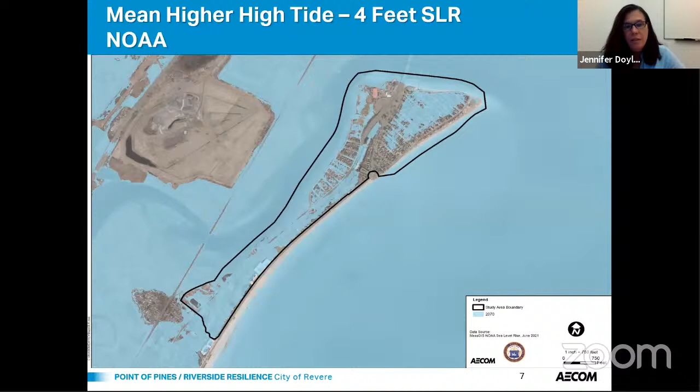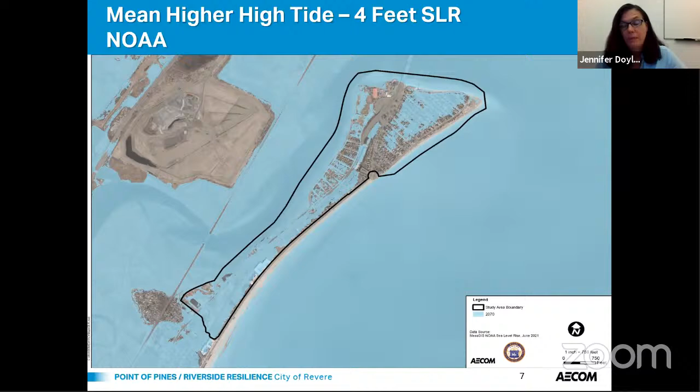So looking at these slides gives us an idea that perhaps somewhere in the next 30 to 50 years, there may be a tipping point coming where, on a daily basis, this slide shows the high tide on an average day, without any storms, a large portion of the study area would be inundated daily. This highlights both the need to consider options to protect these areas, and sets the stage for what 2070 may be like, even if you were to implement some of the tools we're going to talk about. There's just going to be more water closer in everywhere, less beach - that's what is predicted to happen in the future.

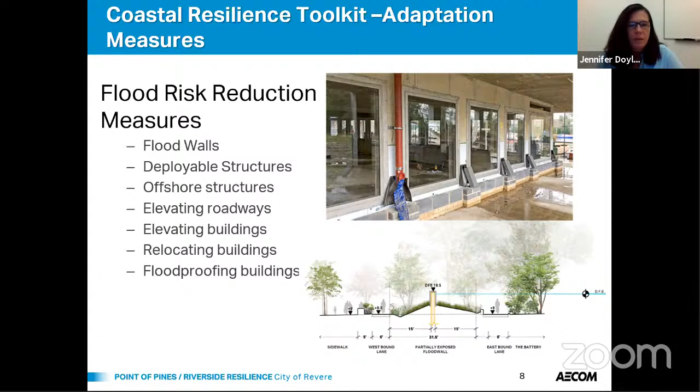The second set of tools we looked at fall into a category we identified as stormwater management tools. These tools would be less effective at holding back high floodwater levels in the future, but they have a lot of benefits for helping to treat rainwater, increase precipitation management, improve water quality, and also improve habitat quality in some applications.

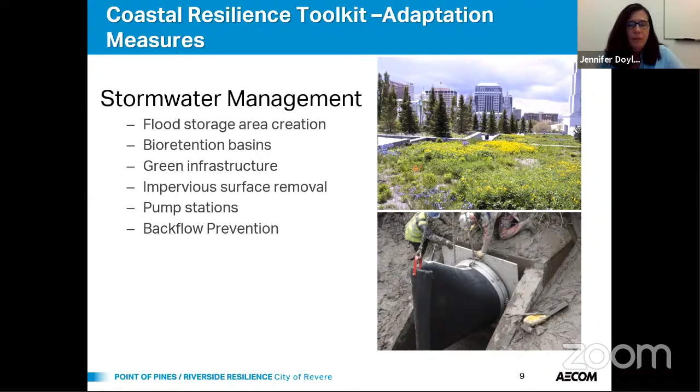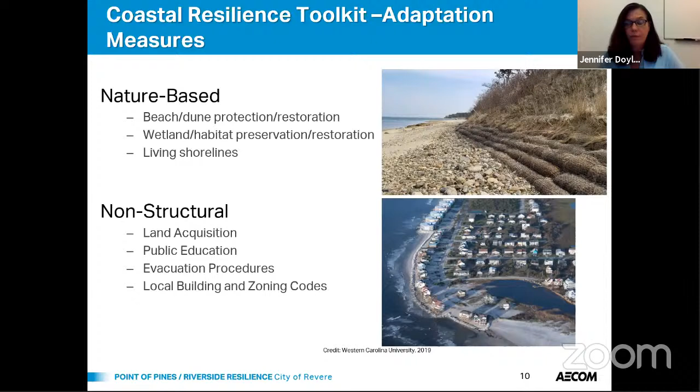Some of the things listed here that could be considered: land acquisition, increasing public education, maybe early warning systems for flooding, improvements or amendments to evacuation procedures, and reviewing the local building and zoning codes to make sure they're being enforced and are strong enough to protect future construction.

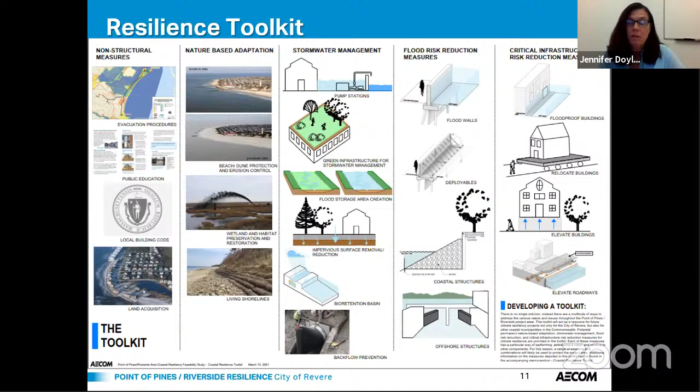Next slide, Erin. So since the last stakeholder meeting, this is one of the things we put together. This is a one-page flyer that summarizes all of those tools that I just mentioned. This was something we identified in the grant as a product of the study that could be shared with other communities too, just a quick one-page flyer to give people a quick snapshot, other municipalities, about tools that are out there, things they might want to consider if they're looking at resiliency measures to protect their communities.

And again, just to emphasize, as Erin opened up with, we're going to see some cost numbers in a little bit. We looked at the relative cost, but they're very much planning level at this point. We wanted to have this as a factor, so we did some initial planning level evaluations of cost to help guide the analysis of the tools.

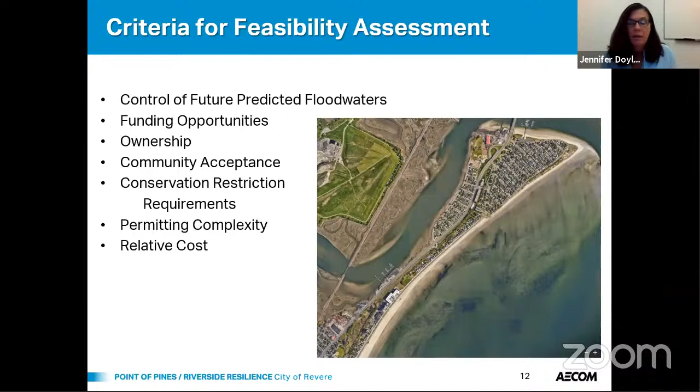So this is a top level summary of what our findings were. Again, I think Elle made available some of the memoranda we've developed so far, so I don't know if people have had time to read through them. There's a lot of information in there, and obviously we have a limited amount of time tonight, so this is very much a top level summary.

But what we found is that different tools have different applicability in different portions of the study area, and they have different pros and cons.

The top one there, flood barriers and deployables. These tools are things we felt were most appropriate and applicable where they could protect relatively expansive areas, really looking at the community residential areas, of which there are basically three in the study area: the Point of Pines area, the Riverside residential area over by Mills Ave, and residences along Route 1A on the southwest side.

Floodproofing and relocation of buildings. This tool was identified as feasible and very applicable for individual critical community buildings, of which there are four in the study area: the fire station, the wastewater pump station, the stormwater pump station, and the adult daycare center. Floodproofing or potentially relocating some of those structures might be feasible for those individual buildings, but floodproofing entire neighborhoods of homes is probably not very feasible. That's why flood barriers were identified as more applicable tools for those settings.

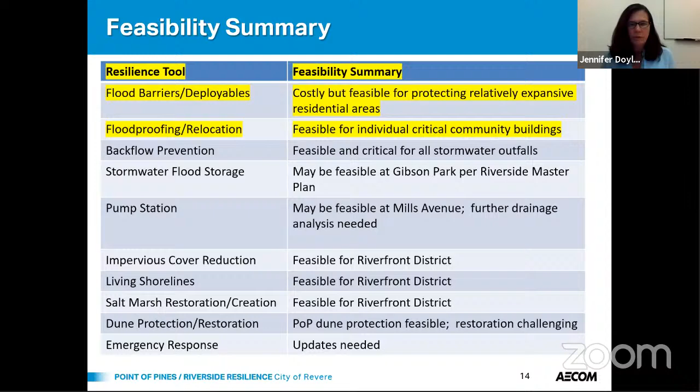Thank you, Jen. Before I walk through how and where these different deployables or flood barriers can be implemented, I'm going to quickly walk through what we're protecting against as far as storms.

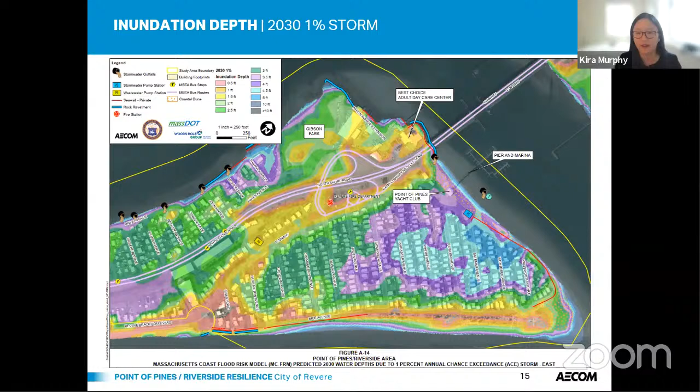On screen now is the inundation depth for the 2030 1% storm, which has a 1% chance of occurring each year—also known as the 100-year storm. You can see different levels of flooding predicted for the northern end of the peninsula. The lighter yellows and reds are shallower depths, ranging 0 to 2 feet in the green, while the darker blues and purples show deeper flooding, ranging 4 to 5 feet.

Now this is 2070, again the 1% storm, and you can see a drastic color difference as most of the peninsula is inundated with dark blue, up to 10 feet of flood inundation. Another thing to note by Route 1A is a small gray area—this is the high ground with no flooding, just a small patch where Erin is pointing.

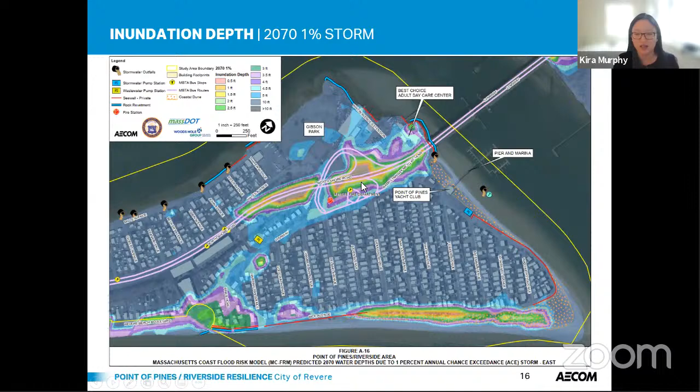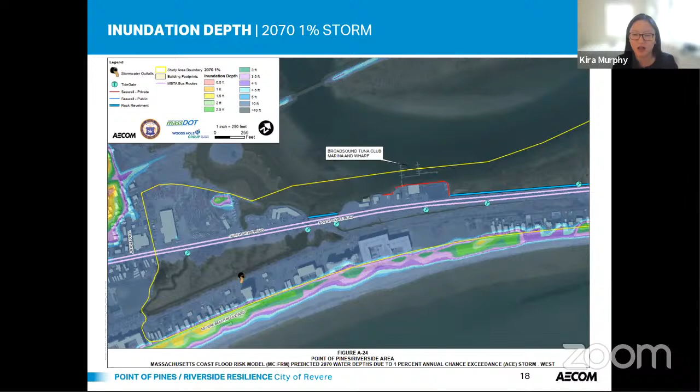When we look at these storms, we look at the design flood elevation, or DFE—the elevation we'd need to achieve to protect against them. For today's storm, the FEMA 2020 100-year storm, we'd need, depending on location and flood design class, about 11 to 13 feet. Jumping to 2070, those numbers range between 15 and 19 feet—a significant jump as we move further into the future.

The difference between flood design class 2 and flood design class 3 is that class 2 focuses on protecting large residential areas, while class 3 focuses on critical infrastructure buildings, which we'll get into later in the presentation.

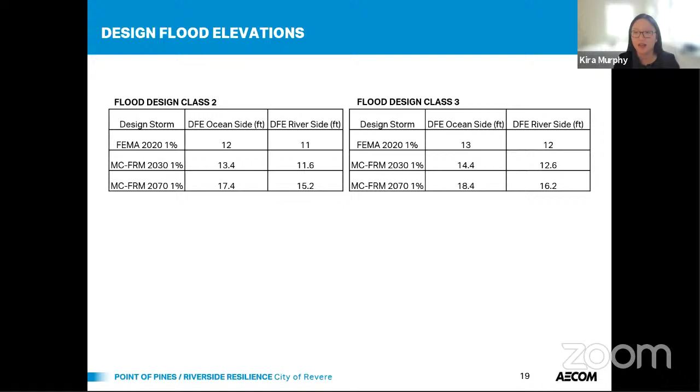The next question is how do we protect against these storms now that we've identified what they are and what elevations we would need. We've identified 3 alignments: A, B, and C. Alignment A has been designed to help protect the Mills Ave area and Riverside community of the peninsula. Alignment B on the eastern side has been designed to help protect the Point of Pines community. And alignment C, in the southern area, has been designed to help protect the residences along Route 1A.

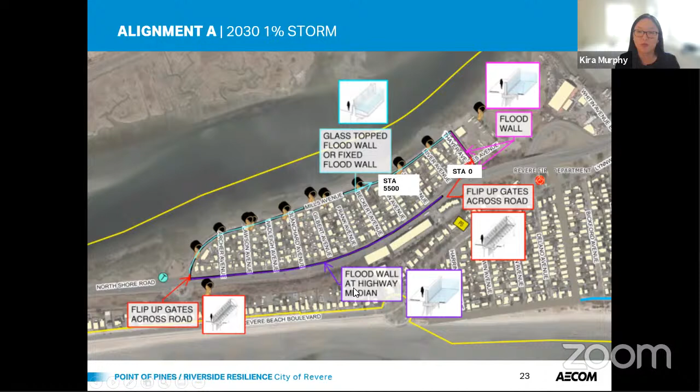As we rounded towards Route 1A, we're proposing flip-up gates across the road. Those are deployable structures to maintain the opening and the current egress in the roadway there. Along Route 1A, we propose switching out the median that already exists between the lanes in the middle of the highway with a flood wall median, and that would extend up to high ground.

Now we have the same alignment for 2070. You might not see a huge difference because high ground here conveniently is located at the start and the end, so the flood wall median may have to be lengthened slightly for the 2070 storm. But in terms of overall layout of the alignment, that is all that would have to change. However, the height of intervention, like we saw before, would have to increase significantly.

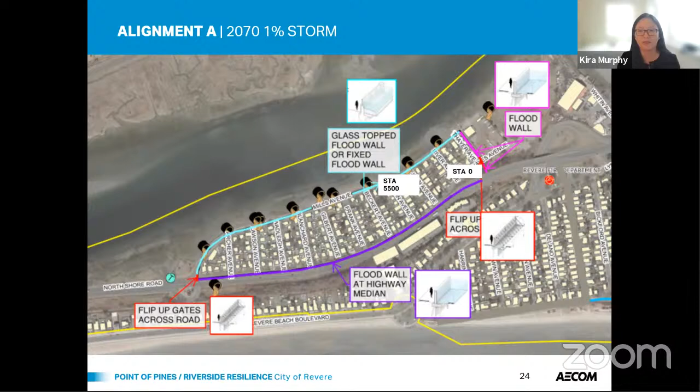Now we're going to look at alignment B, which protects the eastern side of the peninsula in the Point of Pines community. Unlike alignment A, there's going to be a large increase in length for the 2030 or 2070 100-year storm.

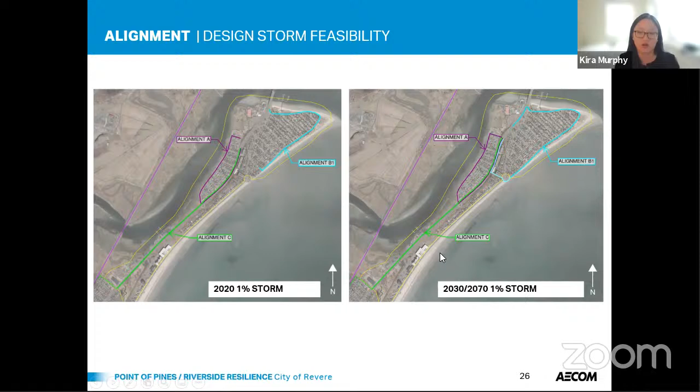In the final section, this is the low point of alignment B, so this would have the highest height of intervention. Now we're looking at between 6 and almost 12 feet for 2070. As you can see, that would be a very, very tall wall next to that person.

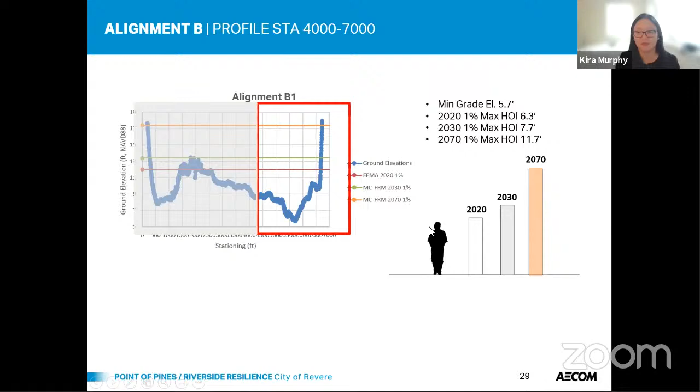So we're looking at in plan what kind of measures we propose for the 2030 storm. We're looking at starting with flip-up gates at the southern tie-in, and then along Rice Avenue, implementing a fixed flood wall.

And then at egresses and openings, we would have deployables such as the flip-up gate or the aqua fence. And then we would easily be able to tie into high ground here. And then any homes that would be outside of the alignment, but within the floodplain, we would recommend raising to protect them from the flood.

Kira, could you talk a little bit about the functionality of the flip-up gates and the aquafence, just briefly? Sure. Thank you. So flip-up gates are both deployables.

Flip-up gates typically sit flush with the road, so you do not see them on a day-to-day measure. And they sit in a bed, and then at the time of rising floodwaters, actually flip up—if you can imagine a book like this, flipping up. And they can be powered through a variety of ways.

There are self-rising ones that actually rise through buoyancy on their own during floodwaters. They can be powered using hydraulic power units. They can also be powered manually with different equipment. And they've been implemented throughout the US on highways, driveways, main roads, a variety of different areas.

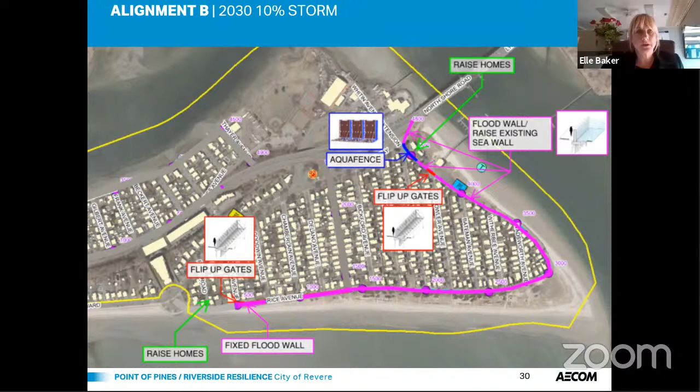Thank you, Kira. And then if we could move into the next slide, great.

So this is also alignment B, but now we're looking at the 2070 100-year storm. And in order to tie into high ground for these elevations, we have to extend the alignment on both the northern and southern areas. So in the southern area, we have to extend south towards Cary Circle and then across the roadway here through property to get to Route 1A.

And then we would continue with that median fixed flood wall. And then on the north side, we would again have to cross Route 1A and then add on some of this median flood wall in order to reach that high ground.

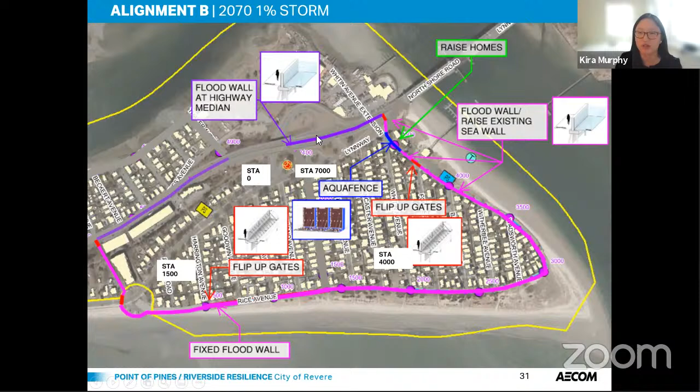Okay, and then the last is alignment C, which protects the residential areas near the southern section of Route 1A. And for this, it would be a combination again of that median flood wall in the highway with flip-up gates at any egresses and a flood wall at the southern end.

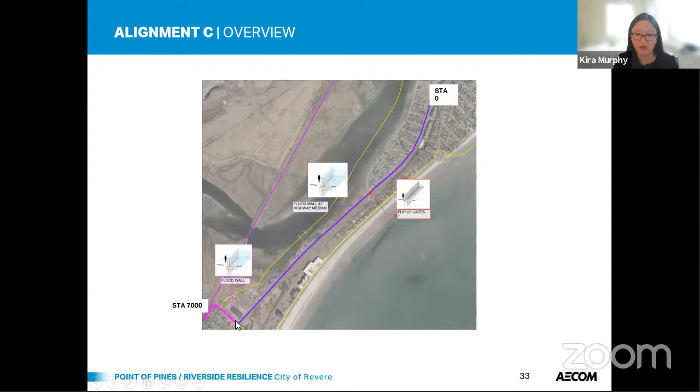Looking at the graph again for alignment C, we're looking at max height of interventions ranging between 4 and 9 feet. And then for the southern tie-in of alignment C, this would fall outside of the project area. Shown on the right, for 2030 we'd be looking to meet a DFE of 11.6, and in 2070 we'd be looking to meet a DFE of 15.2.

And those high ground points only really occur in private residences in this area, which would be quite a challenge. In addition, there is a railroad crossing shown parallel to where that green line is drawn. There are higher elevations on the other side of that railroad crossing, but it would be a big challenge to get over there. So that's why we are restrained by that crossing.

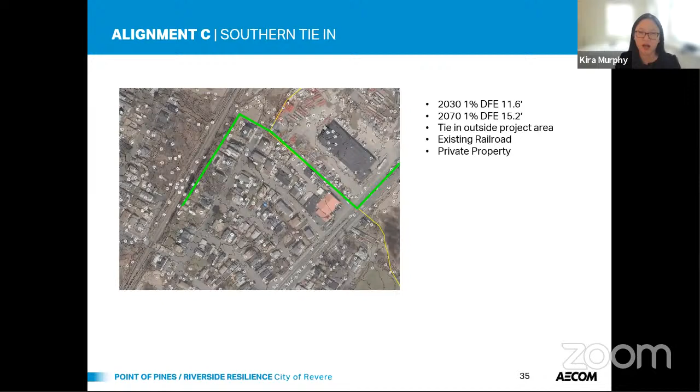And then looking at the critical infrastructure, there are four buildings that we were looking at in this category: the wastewater station, the stormwater pump station, the adult daycare center, and the fire station. We looked into a variety of different flood protection measures for these buildings, including flood proofing the buildings, or also looking at potential evacuation before a storm techniques. And the fire station is actually right now in the process of being rebuilt.

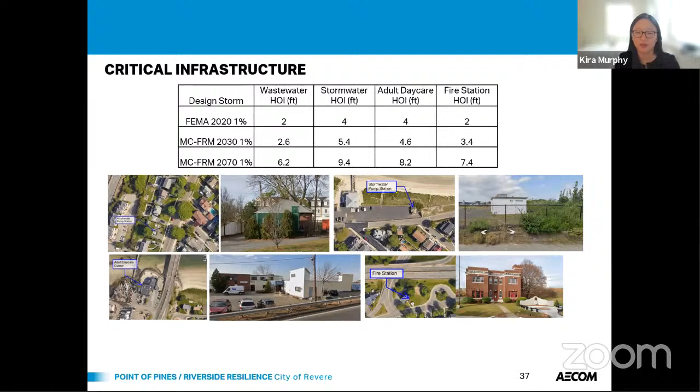And then we looked at a planning estimate for the different alignments that we looked at, as well as the critical infrastructure buildings, and compared the 2020 100-year storm alignments versus the 2070 100-year storm alignments. As you can see, obviously at a planning level estimate, the 2070 alignments are almost double in cost what the 2020 alignments are. And this is because of the need to lengthen some of the alignments, specifically alignment B, and also increasing the robust nature and the height of all of the alignments.

And now I'm going to hand it back off to Erin. Thank you, Kira.

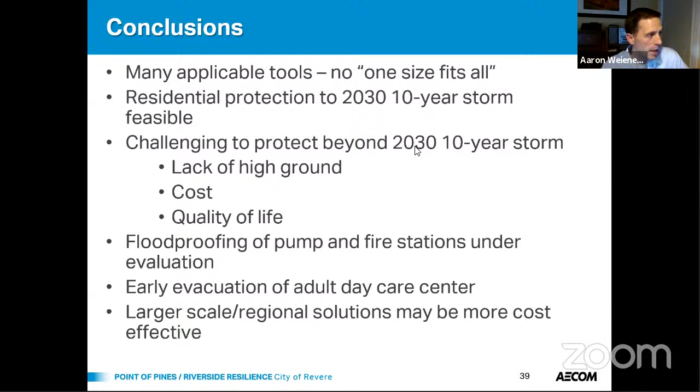So with that said, as I mentioned, this project is funded by an MVP action grant. The deadline for wrapping up all materials is around the corner, a couple of weeks. So we're looking to finalize our products and get our final report submitted back to the Commonwealth by the end of this month, in review and coordination with the city.

That ongoing regional study that I mentioned—the city's actively engaged with Saugus, Lynn, Everett, Malden, the neighboring communities—to really take another look at consensus building around a regional solution, looking at this in a broader lens and more of a regional footprint. This is very important to consider: the benefits, costs, and trade-offs of communities doing it on their own versus embracing more of a regional approach. And with that, that closes our formal presentation.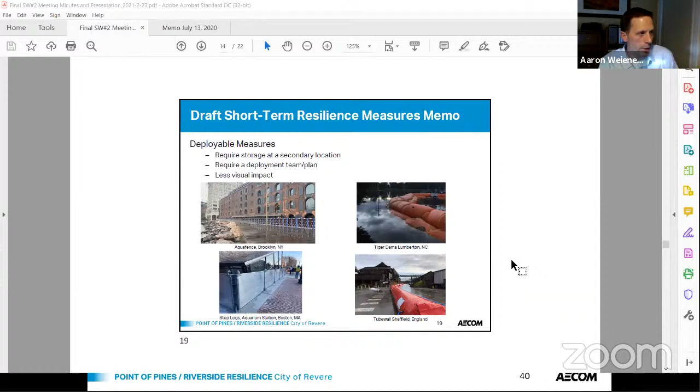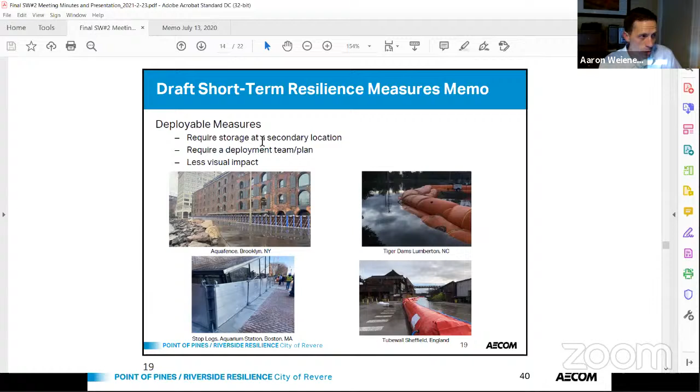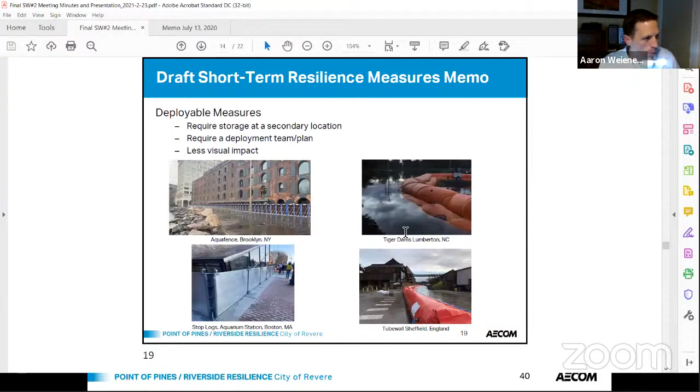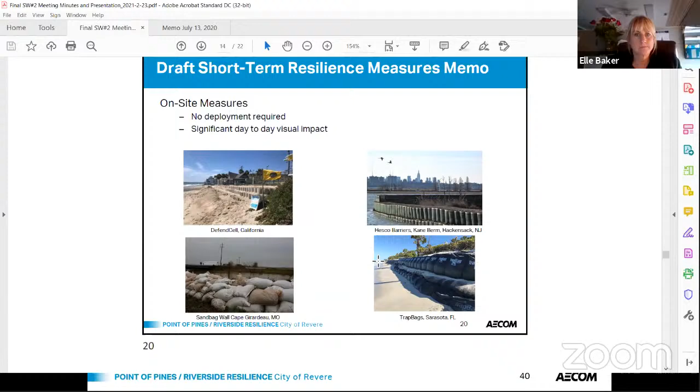These are some slides that were presented at the last workshop, stakeholder workshop number 2 earlier this year, where the focus was on these short-term resilience measures. Again, there is a more detailed memo, but these were the slides that were presented. This is looking at some of the deployable measures that were referenced, things that can be stored offsite, brought out and erected when needed. Others can be left out on site in a more permanent fashion, but here are some options that were identified and discussed. Here are some other on-site measures. For these, there would not be any deployment needed, but you would see them day to day. So there's that aesthetic or visual impact, but it removes the risk of getting them deployed in time to hold back those waters.

As Frank mentioned, that gets more into the Mills Ave Riverside section, looking at what could be done there. On the beach management side, or Point of Pines side, we looked more closely at what could be done with improving the resource that is there now to make it more resilient, looking at potential additional plantings, and changes to the existing pathways connecting the beach to the residents. We came up with a suite of recommendations, ranging from establishing record keeping, to tracking the changing shoreline with aerial photography. One participant noted they recently got the services of a drone pilot to take aerial photographs of the area, doing some of that documentation and monitoring. There's also potential sand augmentation, planting, and public outreach, things of that nature. This is all summarized in more of a memo format, but this is just a snapshot of that content from earlier.

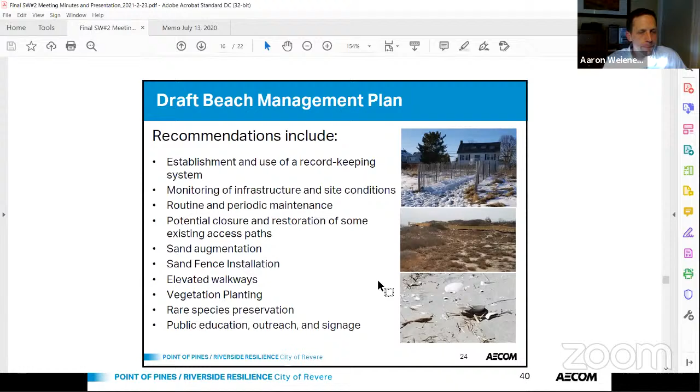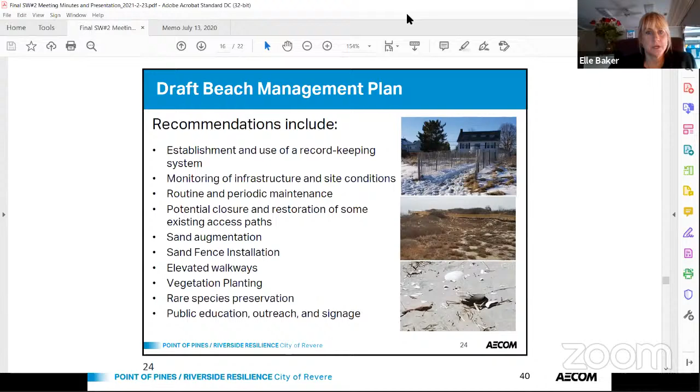Thank you, Aaron, for bringing that up, and thank you to Jen for touching on some more details about the deployables. Just an update, we did have a Point of Pines Beach Association meeting, and Jack, feel free to chime in here as well. It was very well received that we would begin the record keeping as a role, that somebody on the board would assume going forward. Also, a thank you to Jack Bakari for seeking out the drone services to document all the current sand fencing and the current conditions of the beach. Thank you, Jack. No problem, I sent everybody a link to the photographs so you can all have a look. There's a little bit of a paragraph of explanation of how it was done and what we have there.

We hope to, I'd like to create a 3D map. That technology is a little beyond us in terms of cost at this time. But at least we have the data. The data is saved.